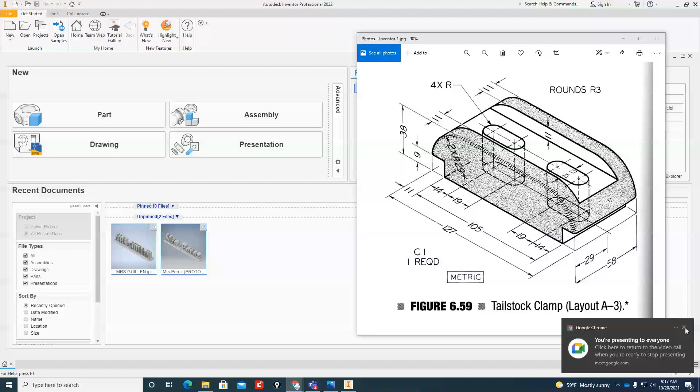Okay, students, how are we going to draw the tailstock clamp?

The first thing to note is it is a metric drawing. It'll tell you here it's metric. The other thing to tell you, as a hint, is the size of them. If you notice, it says 127, 105. Anything that's that big would actually be in millimeters. So this will be metric.

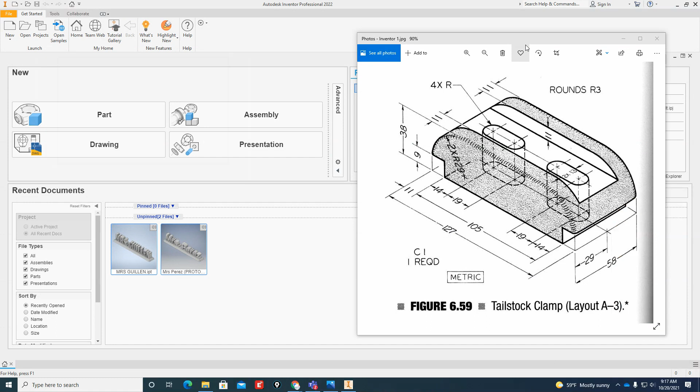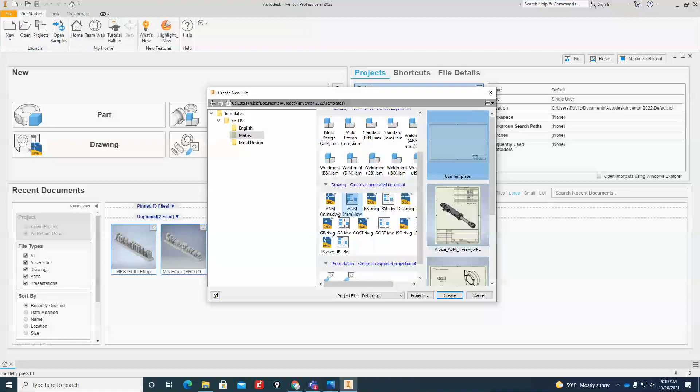Whenever we have a metric drawing, I go in here to click new, and I always like to do that to bring up the templates, because on the templates it will tell me what units I can work with. Remember, English units are inches and metric units are millimeters. Right now we are working with part files. A little later in the semester we are going to work with assemblies, and eventually we are going to create drawings with dimensions and title blocks and all that stuff. That's a little later. An assembly is what we're going to be doing really soon. But for now, we're just going to work on the individual part files, which is why it's called a .ipt file, which is Inventor. And you can see right there, it's already in millimeters and creates.

I'm going to go ahead and create this part file. It's in metric millimeters. I'll wait for Inventor to load the information for us.

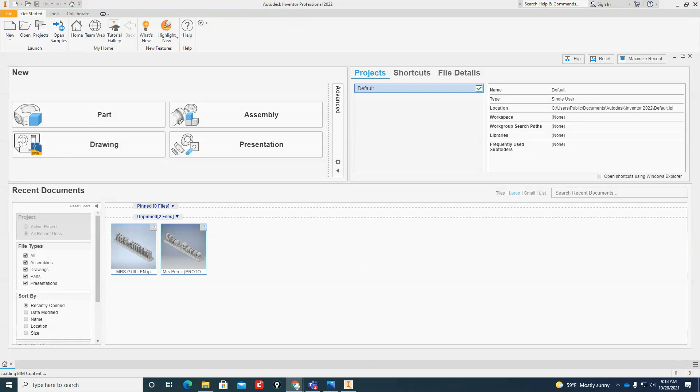So what we're going to do is we're going to start with a 2D sketch. I will explain on a later recording how to work with a 3D sketch, but for the most part we're going to work with a 2D sketch, so we're going to start there. Which plane? Technically it really doesn't matter. Once you get a little bit more experience with Inventor, you'll probably see which one is of more benefit. For this one, I'm just going to use the XY plane to start my first sketch.

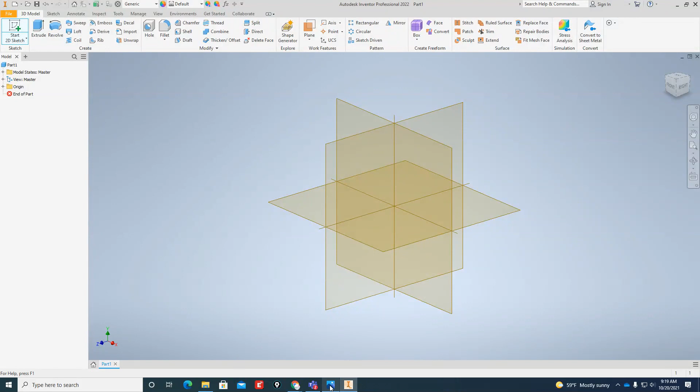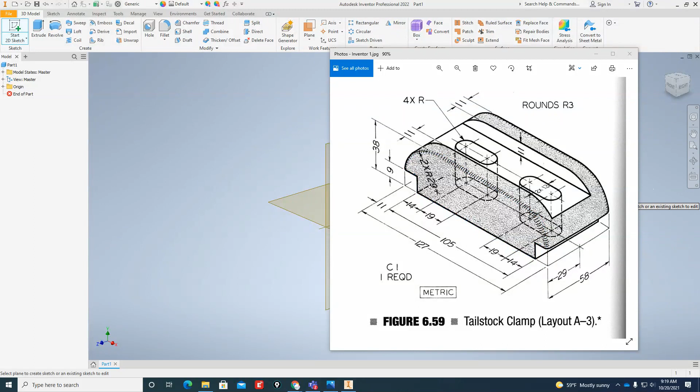The way I'm going to approach this is I'm going to start with a sketch of the shape right in here, which is the outer edge of the shape. A line, another line, a couple of other lines to finish that one up and extrude it, okay? So that's the approach I'm going to take. You can kind of see that it kind of aligns itself with the XY plane. Doesn't have to be, but I'm just going to do that here. I think it'll make it a little bit easier, so that's the one I'm going to use for this sketch in particular. So X and Y. So there we go.

Now, the sketch that I just drew right now, you saw me draw it quickly. I'm going to draw it as a sketch. It's not going to be exact. It's going to be a sketch, but you do want to be as close as possible.

So I'm going to draw myself a line. The first line along the bottom is about 105 millimeters. So I'm just going to start over here somewhere, click over here, and come across to about 105 millimeters. Again, not exact, so I'm going to zoom out a little bit, 105 millimeters.

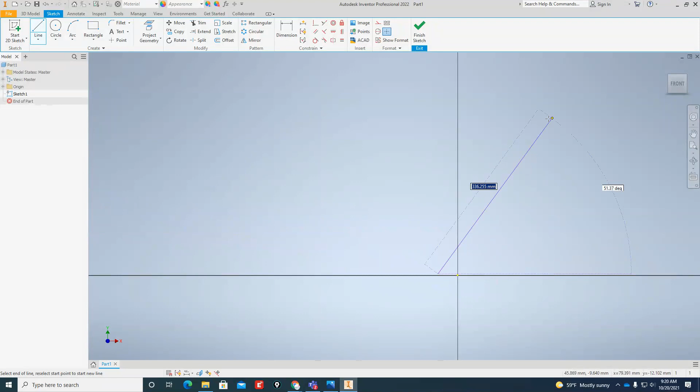The other thing too, notice that where I'm sketching is close to the origin. I'm not sketching out here in La La Land somewhere. I'm actually pretty close to the origin, and that's kind of where you want to be. Not necessarily on the origin, but close to it. I'll tell you why here in a little bit. So it's about 105 millimeters, and then it's going to come up, it looks about 9 millimeters or so. And then across. And then there's an arc in there.

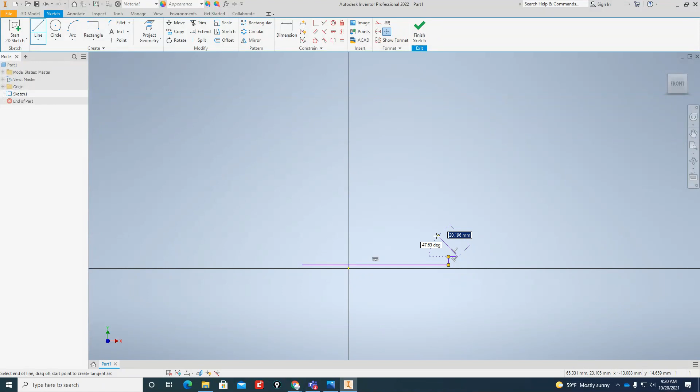I kind of want to draw the arc at the same time, but I really can't do that from this command. I can, but it'll draw an arc that's tangent, and I kind of don't want to do that. This is something I don't usually like to do in Inventor, stop my sketch and draw little pieces of arc and everything. I usually don't like to do that. That's not a good thing. Sometimes you have to, but I am going to do that here. Usually you want to sketch the whole thing in one command and close it up and finish the whole sketch. In this case, I can't do that.

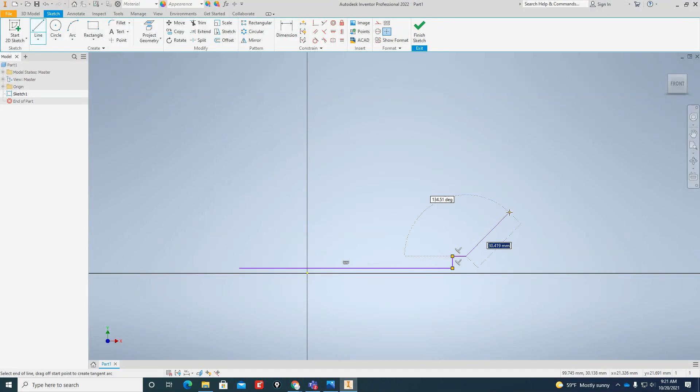So I'm going to have to hit escape, unfortunately. I'm going to draw myself an arc, a 3-point arc, just an arc from here, 3 points somewhere around like this or so.

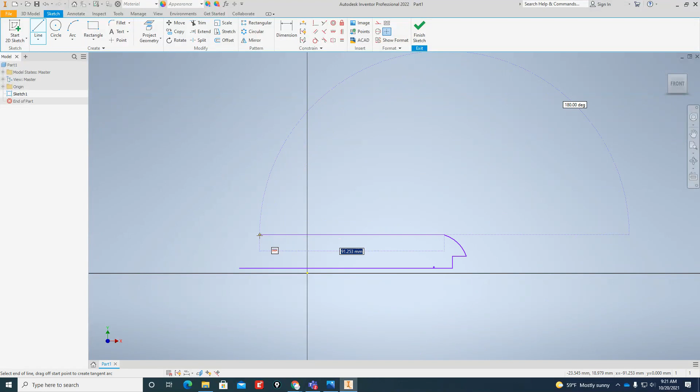Okay, continue with the line that I need, coming across from here. Now there's another little trick I can use: I'm going to draw myself an arc, but it needs to be tangent to this line. So within the same line command, I'll come back to this point, press and hold my mouse, and drag out an arc from there.

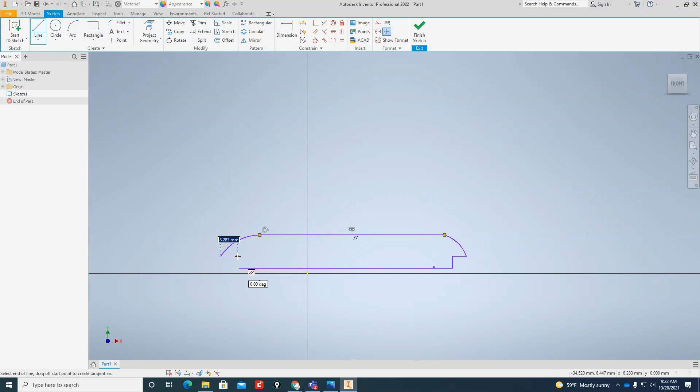I need it to be aligned with that other side, so you see that little dashed line coming across. I want that to happen, so I'll release it at that point, then come across to here, draw it to there, and to there.

So a couple of things are happening. You can see these little weird symbols - those are called constraints. I'll hit escape to get out of the line command, and my constraints disappear. To show my constraints, I'll hit the F8 key; F9 will turn off the constraints. Again, I have to hit escape and get out of the line command to be able to see my constraints.

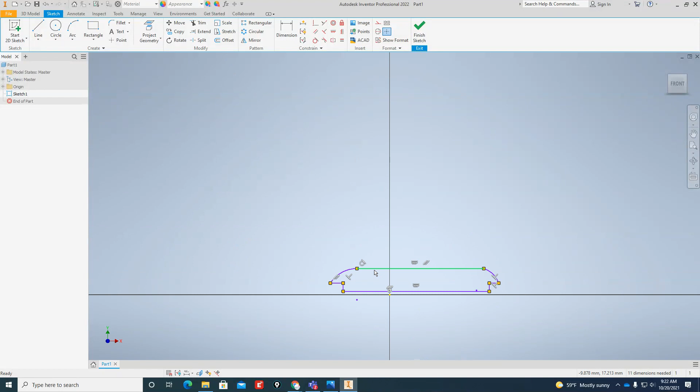One constraint I need to add is a tangent constraint. You can see this arc is not tangent to this line - it's not smooth, kind of like this one here, which constrained itself tangent. So before anything, I'm going to add the tangent constraint from here to here. I need those to be tangent.

Usually what you want to do is start with the coincident constraint first, to lock the sketch onto the X and Y zero. I'm going to use a coincident constraint, usually at the middle - it doesn't have to be, but I'll hover over to find the middle point. There it is, and I'll apply the coincident constraint from that middle point to the origin. I'm starting to constrain the sketch.

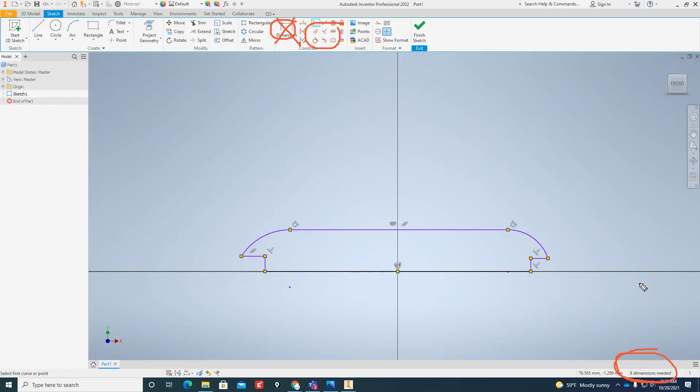At this point I have 8 dimensions that I need. That doesn't necessarily mean 8 of these specific dimensions - it just means I need to apply either geometric constraints or dimensional constraints. But first things first, you want to start with geometric constraints first, so let's see what we have here.

Let me see - to find constraints, I'm going to hit F9 to turn them off, and then move these lines around. Okay, so you notice that this one doesn't stay aligned with this one. So I want them to be aligned.

So what I could probably do is apply an equal constraint to make this line equal in length to this one. But another option is a horizontal constraint, where I can horizontally constrain this point to this point, so it will be aligned - that's a better choice than the equal constraint. I think people overuse the equal constraint; you should use some of these other ones more, even though we could have gotten the same result with equal.

So that one there, and then the other thing is I need this one to be equal in length to this one. So I think I do have to apply the equal constraint from this one to this one, to make them equal in length.

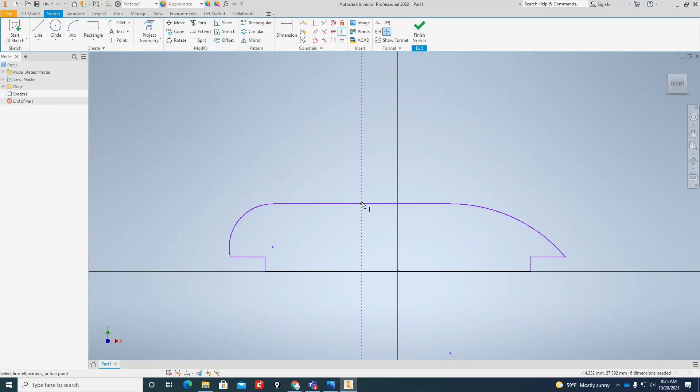The other thing is this sketch is not in the middle, so I need that to stay in the middle. So I'm going to apply a vertical constraint to vertically constrain the middle of this line to the origin, so that it's vertically constrained.

Now you notice the sketch got a little weird, so I'm just going to move it down here a little bit. It got a bit out of shape, and that happens a lot whenever you sketch out far from the origin and then apply your coincident constraint - the sketch gets weird shapes and doesn't work too well. That's why you always want to sketch close to the origin.

All right, so I'm down to 5 dimensions. I think at this point I can now start applying my actual dimensions. For example, let's count them - I'm going to predict that I'll need the 38s, the 9. So that's 1, 2, 3, 4 for the arcs, 1, 2, 3, 4, 5.

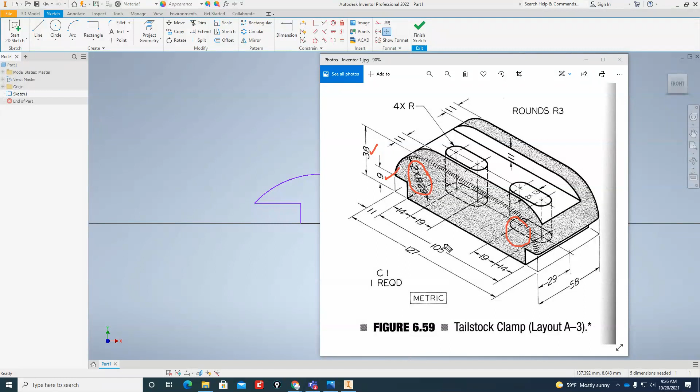1, 2, 3, 4, 5. But for some reason or other, I thought we would need that one too. 1, 2, 3, 4, 5, 6. So, interesting. I think it should be 6. Inventor says 5. Well, let's find out.

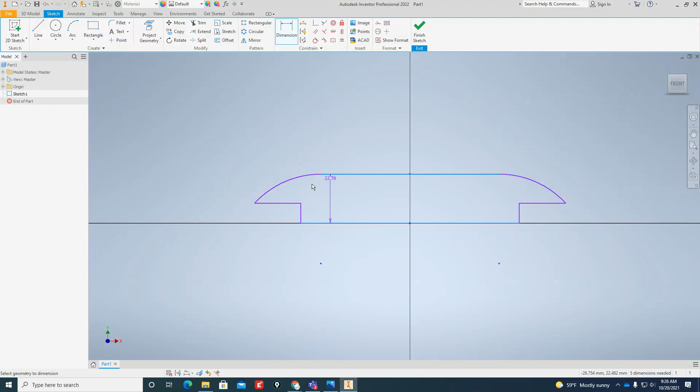Okay, dimension from the bottom to the top. That needs to be 38. And then this line here needs to be 9 millimeters in length. This line here needs to be 105.

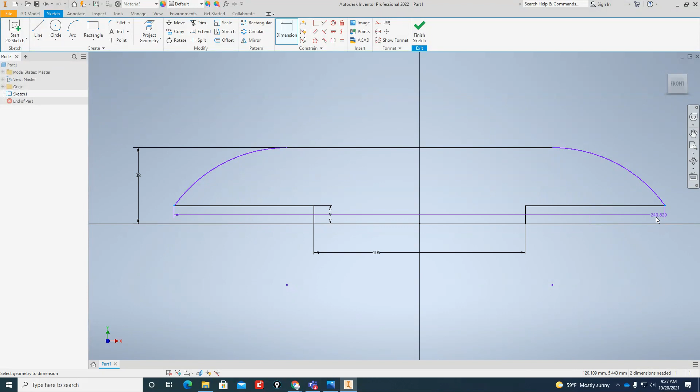And then down to 2 dimensions. This guy from here to here, that needs to be 127. And 1 dimension needed. Ah, yes, very good.

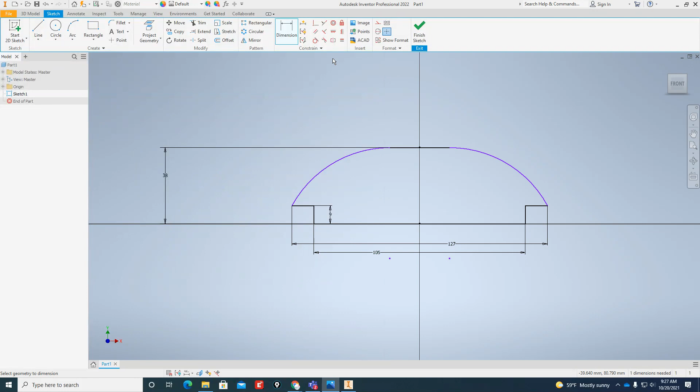Because of my geometry, both of them have a radius of 29, but because they're tangent and all these other dimensions, I only need to dimension one radius. That's why it says 1 dimension. So there we go. Select this guy, and that has a radius of 29. Enter. Very good.

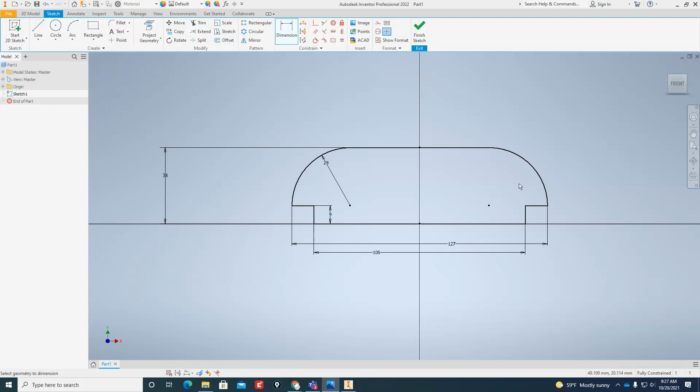Fully constrained. Okay. This actually looks a little bit different than the sketch. I envisioned it a little bit flatter, but hey, it is what it is. Excellent. Very good. Fully constrained, that's what you want, finished sketch.

Okay. Now, one thing I'm going to do is extrude it. We need to extrude it a full 58 millimeters. But this is what I'm going to do that's a little bit different than what a lot of you guys are doing. I'm going to go the distance of the 58 millimeters.

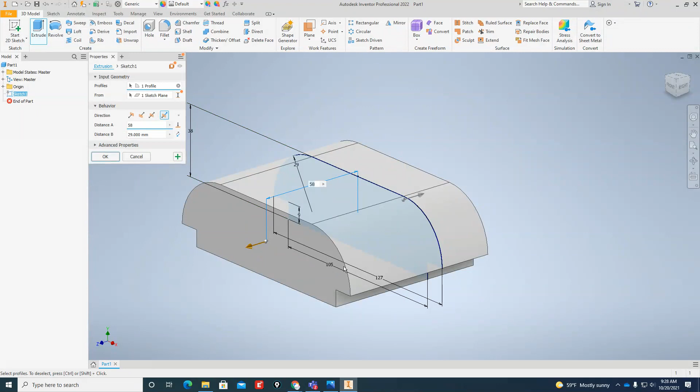What I'm going to do is change the direction, because you can change it from the default direction to the flip direction or symmetrical, which is basically 58 divided by 2, so it divides it by 2. You can also do asymmetrical, where you would put in the distance from one side to the other. That's called asymmetrical. Don't use that a whole lot, but I will use this one in this case.

Okay, so I'm going to go symmetrical for a total of 58. So from the origin, it's going to go half and half for a total of 58 millimeters. There's a reason why I did that, because now what I'm going to do is do a sketch to cut out this little piece.

The sketch I'm going to do is a sketch of this shape here. And this shape, I'm actually going to do it from the middle. I'm going to draw that shape in the middle and do a cut extrusion from the middle.

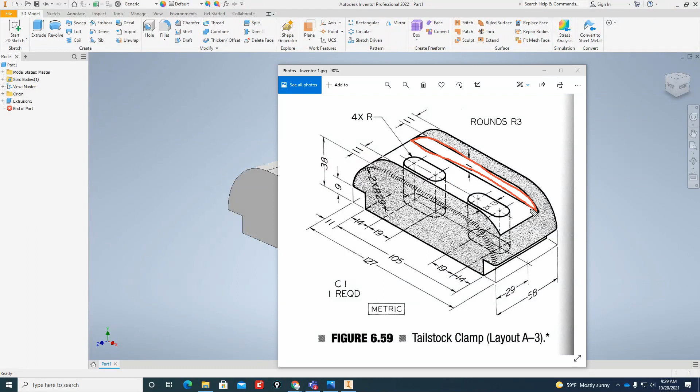So to do that, I'm going to create a sketch, but I am not going to pick any of these faces. What I'm going to do is pick the original origin X and Y plane. So to create my sketch, I'm going to expand this thing over here that says origin, and I have my X and my YZ, XZ, and XY plane.

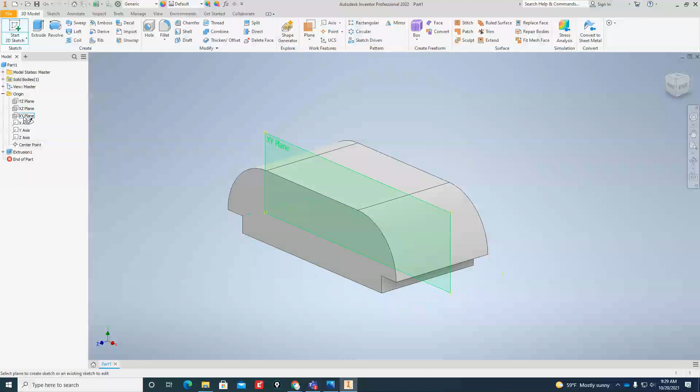So my sketch, I'm not going to sketch it on any of these. I'm actually going to sketch it by expanding the origin, the XY plane, select. So that is where I'm going to sketch right in the middle. Of course, I can't really see in there.

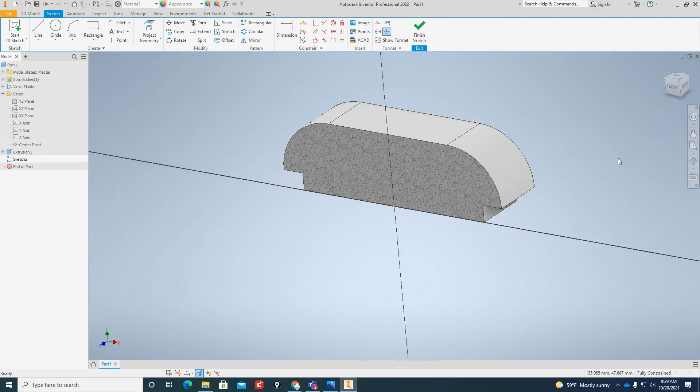So a new F key I'm going to show you is called Slice Graphics, F7. What it does, it slices the graphics temporarily to that middle point, okay?

And then I really just need to draw that line across here and dimension it from the top to that line of 11 millimeters. The thing though is that I don't have any geometry in here. I need to be able to draw the line from an actual object snap, but there's really nothing there. So right now that I hovered over it, it showed up.

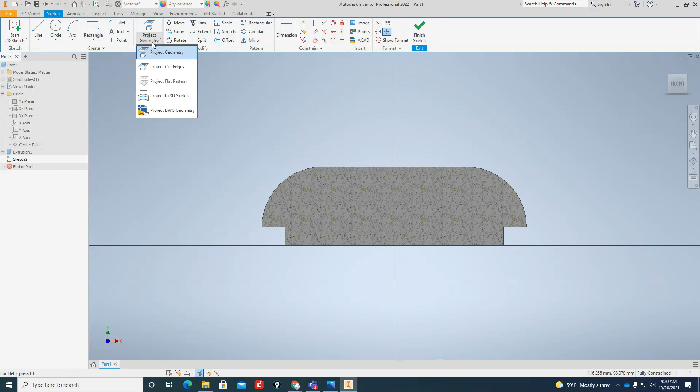But another thing I can do is project some geometry. I can project geometry by selecting individual edges, or I can project all my cut edges. And what that does, it brings up temporary lines all the way along the edge that I can then use to draw my line from that temporary geometry across.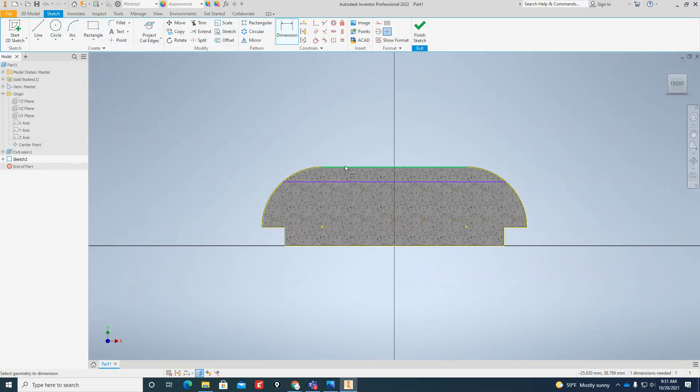Okay, I'm going to hit escape and predict that it's going to say one dimension needed. And there it is, one dimension needed. A dimension from the top to the bottom here of 11 millimeters.

It's fully constrained, finish sketch. My sketch is in the middle, so I'm going to go ahead and extrude, picking that profile right in there as a cut extrusion.

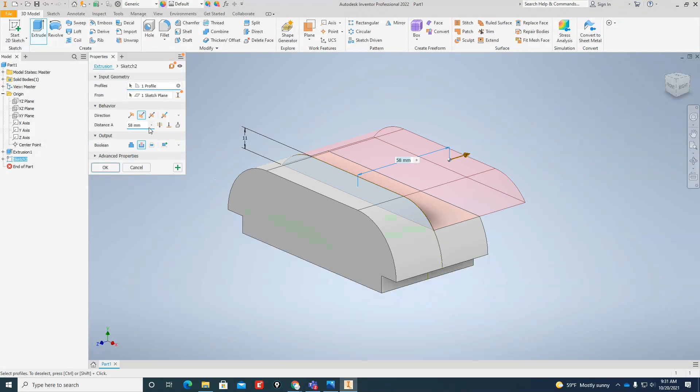Symmetrical, a total of, according to my drawing, what is this total right in here? Oh no, I don't know what it is. What I do know is that it's 11 millimeters, and the total is 58.

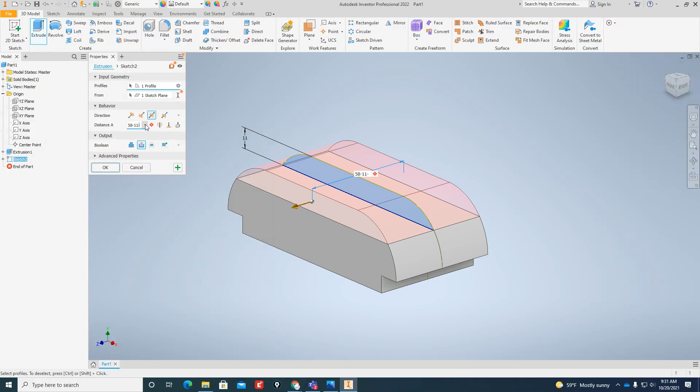Don't forget, Inventor does math for you. So I can go, my distance is going to be 58 minus 11 minus 11. Hit okay, that takes care of that part there.

And then last but not least, I do need a sketch of this middle part here to draw in these slots, and they are called slots, S-L-O-T-S. So I'm going to draw another sketch here in the middle.

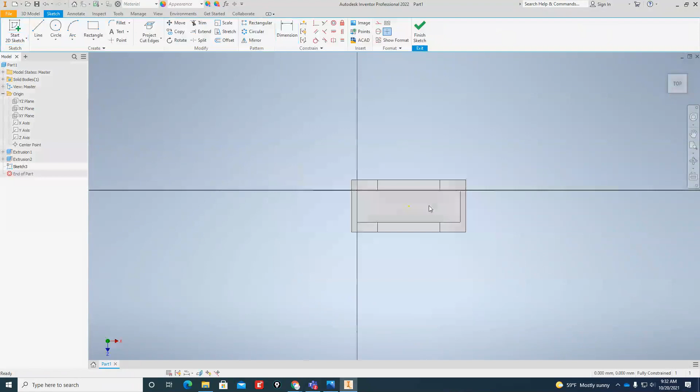And in there, I'm going to draw, let's see, we used to have a slot option. Oh, there we go. So under rectangle, of course, you can draw lines and circles and all that stuff, but under rectangle you'll find this thing that says a slot.

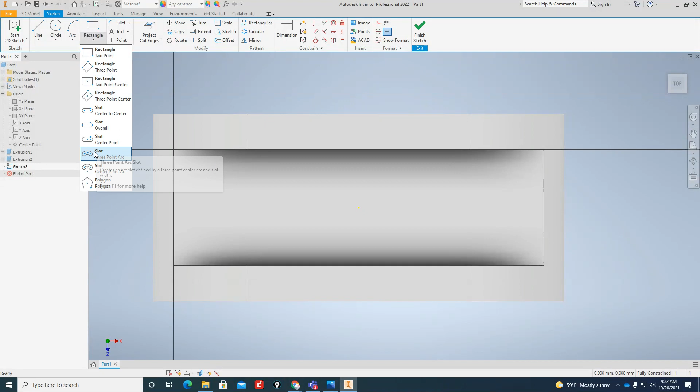And this one is center to center, where I draw the center line and constrain it, and an overall center point. We even have a 3-point arc slot. So we have them all, different kinds, and we even have polygons.

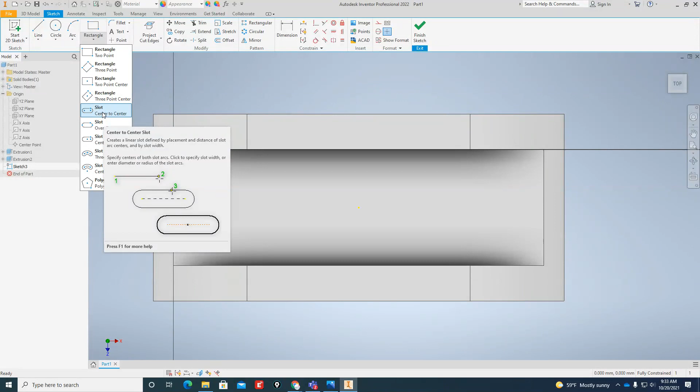So based on the information that I have, I think I'm going to go with a center to center slot. This is what I think I'm going to do. And then I'm going to do even something nicer. So I'm going to click this one, and draw a slot from center here to center here, and like that.

And then I'm going to hit escape, and I need 4 dimensions. So I can tell you the dimensions I'm going to need. If I can move this thing around, that's not a good thing, so what I'm going to do is horizontally constrain it, constraining the point here to the origin or the center. So 3 dimensions.

The other dimension I'm going to need is the radius of this guy here of 4. And then 2 dimensions needed.

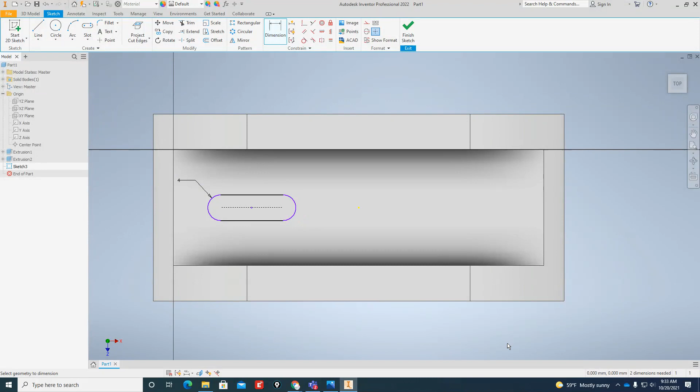The dimension I need is from this edge here at the bottom. I need a dimension from this edge to this point, because that's what we have here. From the bottom edge to the center of the slot is 14 millimeters. So I'm going to dimension from this edge down here to the point right in here of 14 millimeters.

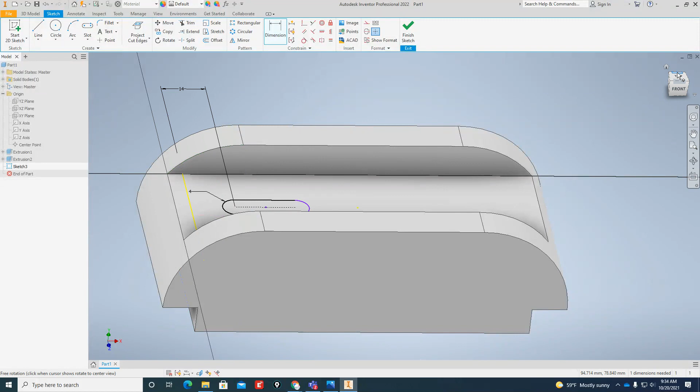There you go. You can kind of see that I actually projected that geometry automatically, which is projected from this bottom edge to this plane.

And then 1 dimension needed, which is what I suspected, of the length of the slot from here to here. And that one is 19.

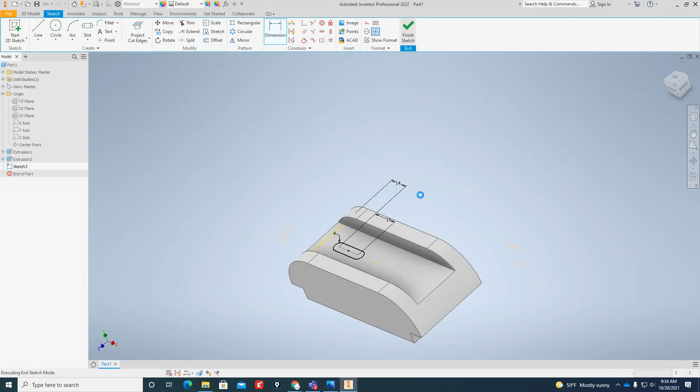Fully constrained, finished sketch. And then I'm going to go and extrude that sketch as a cut extrusion. The distance is going to be not a distance, but through all, so it's basically just going to go through the whole thing, pretty much how it says on the drawing.

Okay, one last thing to show you guys, this other slot over here. Okay, so this slot over here, okay, this doesn't make sense. 2 times R29, a radius of 4. That kind of doesn't make sense to me. I'll have to study that a little bit.

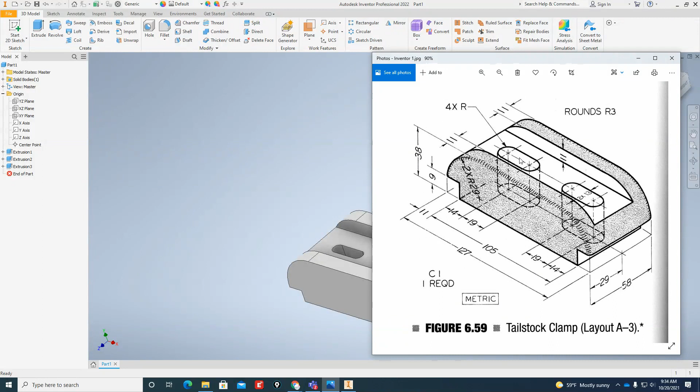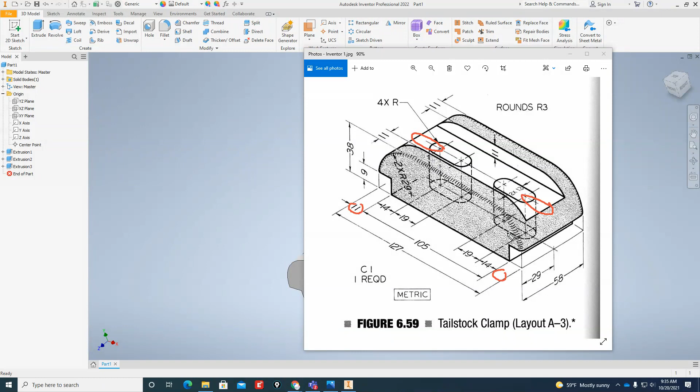But if anything, the other thing I was going to show you, as far as this slot, I hope you agree with me that the distance from the edge to the center is actually the same as this one from here to here. If we did the math, more than likely this would be the 11 millimeters that we have over here. So because of that, I can actually use a mirror command.

That's another neat trick to use. And what I'm going to do is go over here to mirror, and going down the list, what am I going to mirror? I can go and pick my feature here, or I can go pick the extrusion from over here. That's the feature I want to mirror.

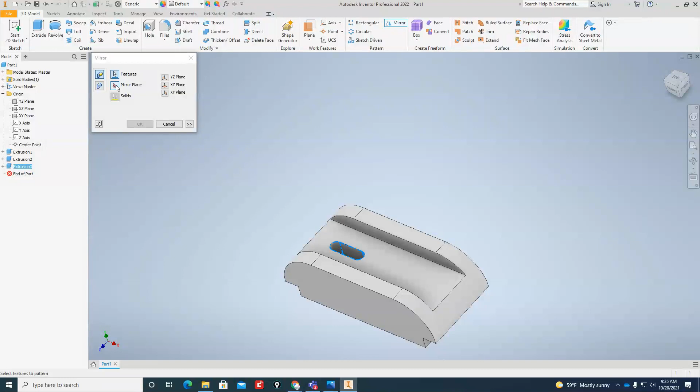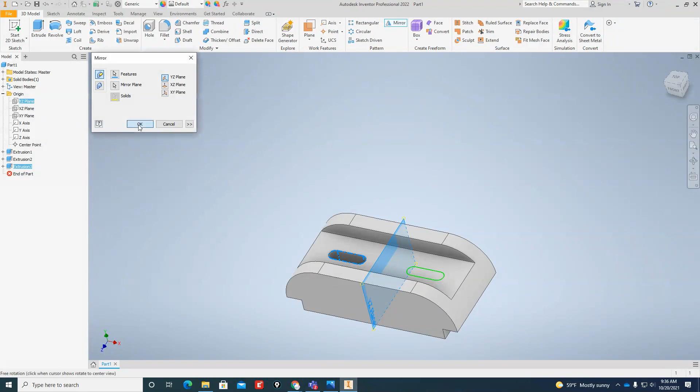And then my mirror plane. So I click on mirror plane, and then on mirror plane I can go and pick one of these, which is why you want to use that center point, because that way I can use the YZ plane in this case, to mirror this feature along the YZ plane from one to the other. Hit OK, and you got it all at the same time.

Okay, so I'm hoping this helps you on how to draw the tailstock clamp a little bit easier.